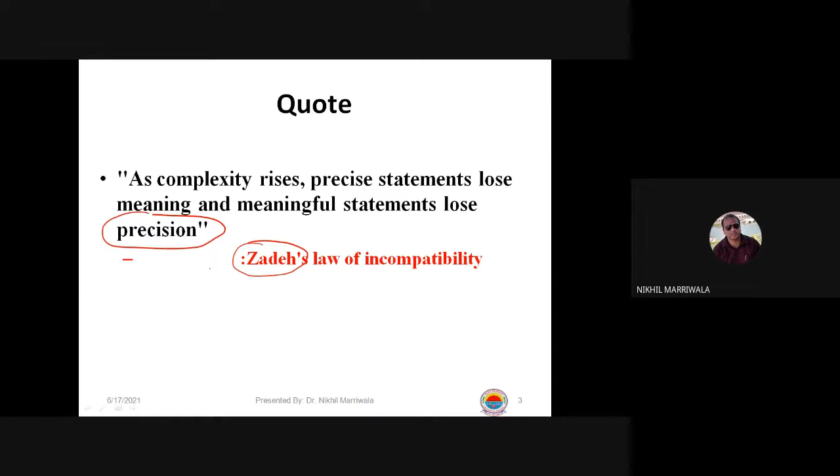Both these quotes are very important when you start designing something, which is why I've taken them. As you increase the complexity of a system, the precise statements you are talking about actually lose meaning. And when you go to meaningful statements, the precision of the system is lost. So how to make a balance between the two? This is what we'll try to learn today.

I'll not take much time with the outline part. I'll move straight to fuzzy logic based systems. These are what we'll be talking about today: how a fuzzy logic system or fuzzy system designer will help us identify the correct output from complex, nonlinear input systems.

This particular chart talks about a knowledge base, which is driven by a rule base and database. The inputs are given to the fuzzification module. The fuzzification module fuzzifies the inputs based on the membership functions that are decided. The fuzzified input is given to the inference engine, which performs some manipulations—I'll tell you in detail how we'll do that. Lastly, the reverse of fuzzification is done by the defuzzification module, and a crisp output is generated.

So a crisp output is generated by the system. The input received is highly nonlinear and complex in nature—the system is also very complex. These inputs are fuzzified based on different membership functions, then the inference engine comes into picture, and the defuzzification module defuzzifies this. So this is a general system.

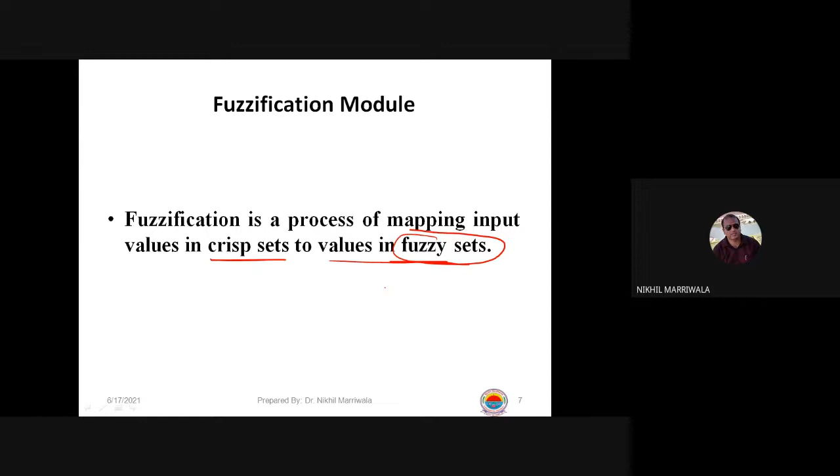The knowledge base is very important in this. How this knowledge base comes into picture and how the fuzzification module deals with us—I'll try to talk about a few things. Fuzzification is a process of mapping values in crisp sets to values in fuzzy sets. We'll be talking about this term called fuzzy sets. Try to remember these words. I'll show you in the software how these would be accommodated.

Knowledge base, as I told you, comprises the rule base and the database. So what is rule base? Rule base is something that we normally talk about.

Right now we were facing a technical glitch. So if, say, I'm using 'if' here—if the WebEx would have worked, then we would not have shifted to the Google platform.

If this would have happened, then this would have been the outcome, right? So we are talking about something in the form of linguistic variables. The database basically is the one which provides us the linguistic control. This is the word used to define the linguistic control, and the fuzzy data manipulation in a fuzzy logic based system is done mainly based on these linguistic control variables.

Rule base is taken from the domain expert. You can call various experts who have delivered lectures in this particular FDP the domain experts of IoT, and their expertise can be taken into consideration for help in designing a particular system, and that can be done in a systematic and easy way - that is, the linguistic manner, like we are talking right now. So whatever we are talking can be described into mathematical functions, and then this can be analyzed by the system. This is what we'll be trying to learn today.

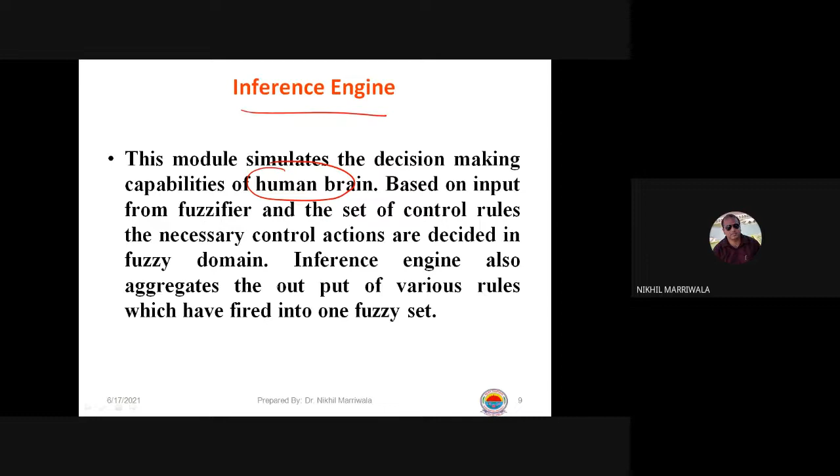The inference engine is basically a module which helps decide or make decisions, just as a human brain. The module is helping us decide what decision has to be taken. Once the fuzzified inputs are received, the implication methods are performed, and all the brainy activities, the decision making activities, are done in the inference engine part. So inference engine is aggregating all the outputs for the various rules which are fired into one fuzzy set.

I hope, sir, my voice is coming pretty much audible. There is no technical problem happening right now. No, there is no technical problem. It is going smoothly. Great, sir. Thank you very much, sir.

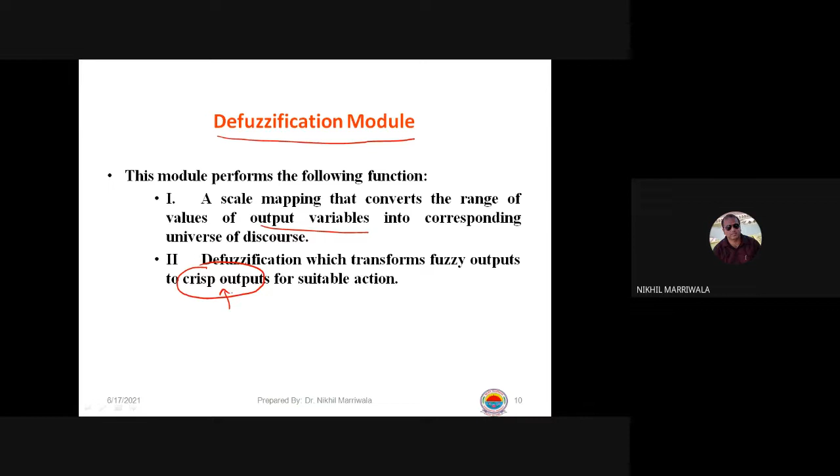These techniques are: the center of gravity, the center of sums, the height of defuzzification, center of largest area, and the mean of maxima approach. So we can select either of these, and these will help us defuzzify the input part, and this is how the system would look like.

If you see, we have the inputs which are fuzzified. The membership functions have to be given in this case. We apply the fuzzy operator here, and then the implication method is given. Once the method is applied, the aggregation of all the inputs received is done, and then the defuzzification is done, and the output - crisp output - is generated. So this is just a flow diagram that we need to understand.

Though it might be looking a little difficult to you, when we design it right now, all these things would be covered in this fashion itself. So this is how internally it would look like. Say we have temperature as an input, or a derivative, or some of the derivative inputs are also given. The inputs are given to a fuzzification module. The fuzzification module decides upon the membership function - Z type, triangular type, or sigma type - whatever has to be selected.

Once these membership functions have been decided, the input is given to the composition module, where we decide about the operator - we decide about both things. The manipulations are done. Then it is given to the implication module, where you again perform some manipulation - again the brain concept, similarly to a processing unit, where all the processing is done, the implication is done, and lastly the aggregation part, that is the maximum or minimum part, is taken.

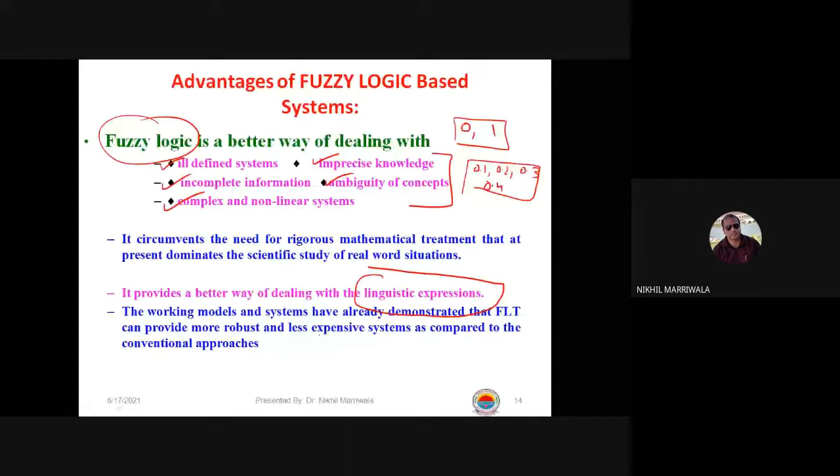So fuzzy logic based systems are definitely considering these intermediate values also, and they're helping us resolve things in linguistic expressions. So this is the important part, right? So today the software that I'll show you would actually have no programming involved. The beauty about it is that we won't write a single code. I'll just use the block configurations and we'll resolve the problem, right?

So, hello? Yes, sir. Anything? Any inputs? No, nothing, sir. Please continue.

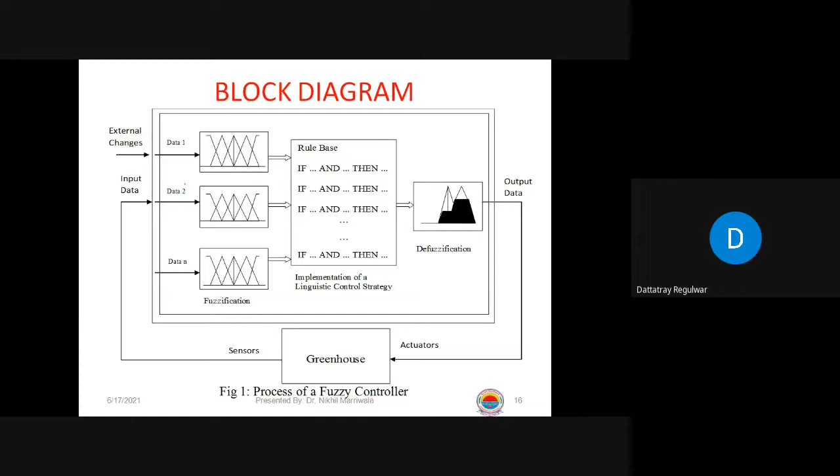Okay, sir. So this is the block diagram, and we will be referring to a highly non-linear and complex system called a greenhouse today. I'll show you how this model would work, and we'll define and design this model on our own, right? So a greenhouse is basically a very highly complex and non-linear system. I don't know how many of you know this structure, but I'll give you a few features and then we'll talk about it. This block diagram says that we have to control this environment, the artificially controlled environment where plants are grown, right?

So several sensors are involved. Now, how IoT is linked with this, I'm trying to give you that idea. So these sensors are basically helping us in analyzing the inputs. For example, the sensors can be a temperature sensor, a humidity measurement sensor, a solar radiation measurement sensor, a CO2 level measurement sensor, whatever you want. So these sensors are taking inputs, and then the input data is given to the fuzzy logic controller that we will design, and then the data is processed and the crisp output is generated.

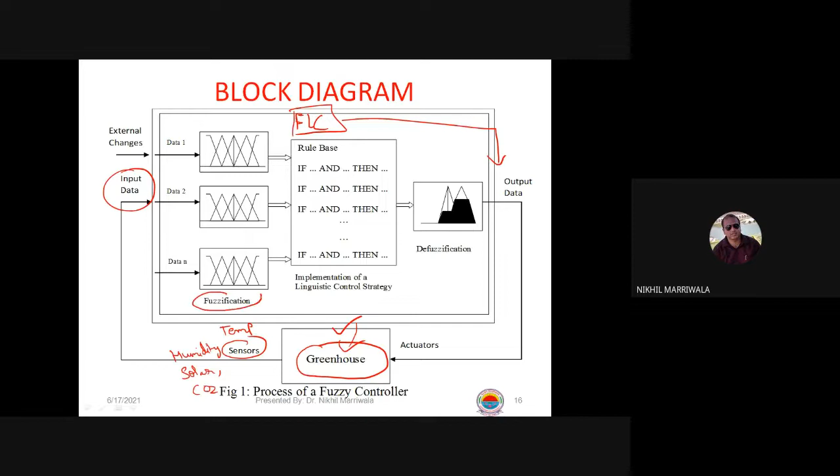So the three major steps that I gave you: fuzzification of the system, implementation of the linguistic control strategy, and the defuzzification part. We will be performing this and analyzing how a system would actually behave or perform under different conditions, right? There are some external changes also which can be considered over here. Now, how the Internet of Things can help resolve these things, I'll show you a very interesting diagram over here.

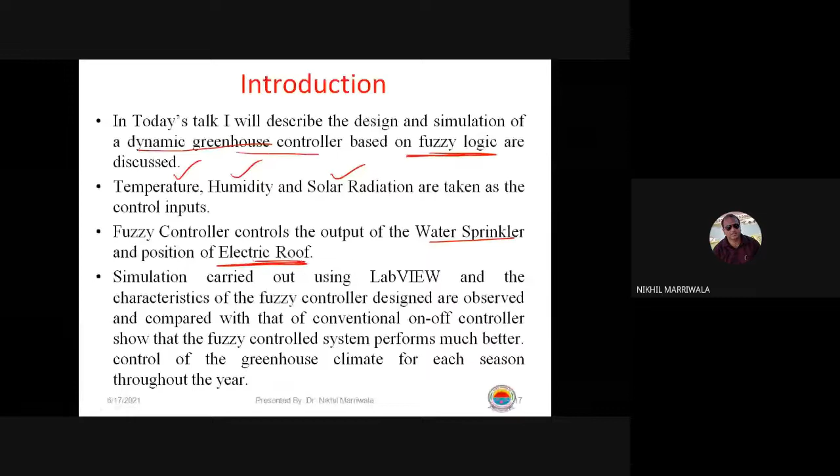So I've already given you what we'll be talking about. We'll be talking about designing a dynamic greenhouse controller based on the fuzzy logic system. The three inputs that we'll take into consideration are temperature, humidity, and solar radiation, and they are controlling the water sprinkler and the electric roof of a greenhouse. So this is what has to be controlled by the fuzzy logic controller.

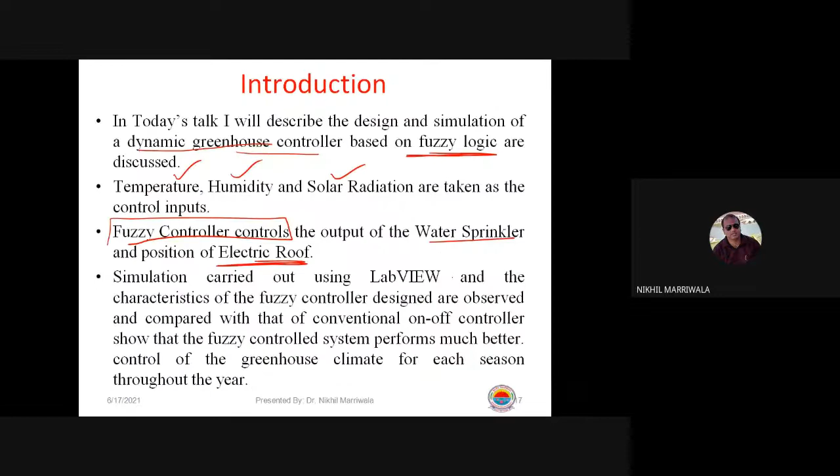Okay, so in earlier days, in the greenhouse systems, all the actuators, such as the water sprinkler and electric roof, were basically being controlled by normal on-off controllers. So a person is sitting, he gets some information or he sees the weather, and the on-off controller performs the action. It takes time, right? If the person gets sleepy and sleeps in the night, the rain comes and the crop gets damaged, or the temperature rises and the crop growth gets damaged.

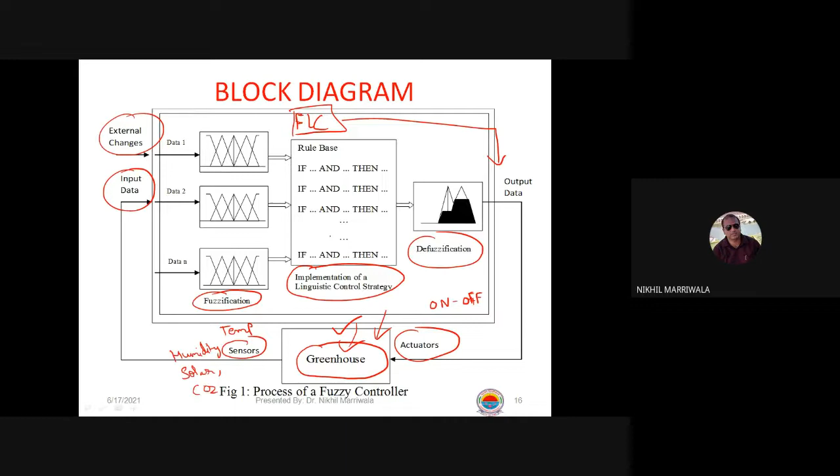So these are the things which we want to avoid, and we want to make this artificially intelligent enough so that even if there is nobody, the sensors are connected in a particular loop and the actuators perform the necessary action, right? So how to do this? So a greenhouse, as I've already given you, is an enclosed structure which is designed to grow plants with enhanced growth.

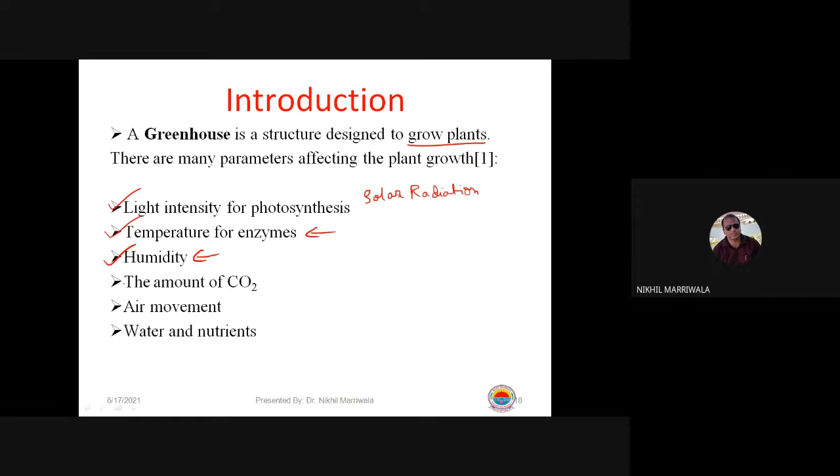So what are the factors affecting the growth of the plant? We already know them. Light intensity for photosynthesis; when I talk about light intensity, I'm talking about solar radiation coming inside. I can just write it down: solar radiation. Temperature for enzymes, and humidity. Yes, we will be taking these into consideration. The amount of carbon dioxide, very important for any plant to grow. Air movement inside it, water and nutrients. So everything you're talking about is affecting the growth of the plant, and this is a very highly non-linear structure, right?

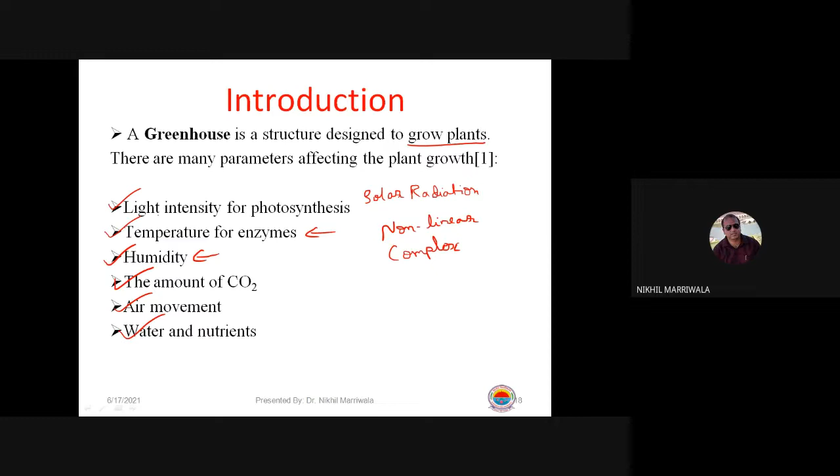Non-linear as well as highly complex. So see the things that are involved over here. So when we talk about this kind of a scenario, we want that this particular problem should be resolved amicably and easily. How to do that? So we'll just see this situation, right? So greenhouse basically will be the solution to provide a growth of plants effectively.

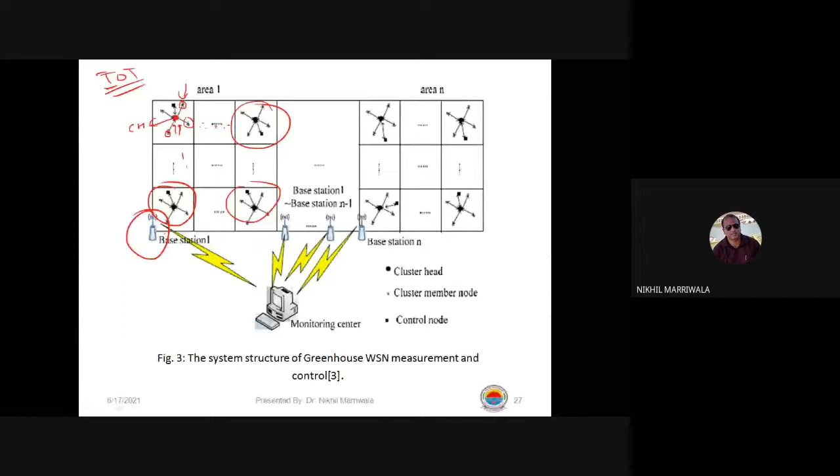The measurement of temperature. Say these days you've normally seen warnings coming for storms. Now how are we getting them? Through satellites or through different sensors that are being placed in the ocean somewhere around. We are even getting some inputs of the change in weather conditions, change in temperature, analyzing it through the base station. Similarly, we have placed some sensors somewhere in a particular area. These are clusters of sensors. They are providing information to this base station. The base station thus transfers the information to the monitoring station.

Now, this is important. The monitoring station is the one where all the data from different base stations is collected. Now, the data is collected and processed. This processed data is then sent back to different fields or different concerned people, so that the action can be taken well within time, and there is no harm to the environment, no harm to the crop, or no harm to the situation where we are actually, right?

So say, for example, if an earthquake is to arrive and we are told even a minute before that, a lot of lives can be saved, a lot of things can be saved. Even seconds before an earthquake can also help us out, right? Or even warnings of storms these days are preventing loss of life. So Internet of Things is playing a huge role in this.

IoT systems are basically ones where we transfer the information these days onto cloud. Right? Now the cloud systems are the ones which are gathering the information, and that can be made public or even private for you to actually see the data being driven, and you can use that, right? So the same thing can be done for the COVID data, the same thing can be done for temperature measurement, any type of measurement, right? So Internet of Things is playing a huge role in this.

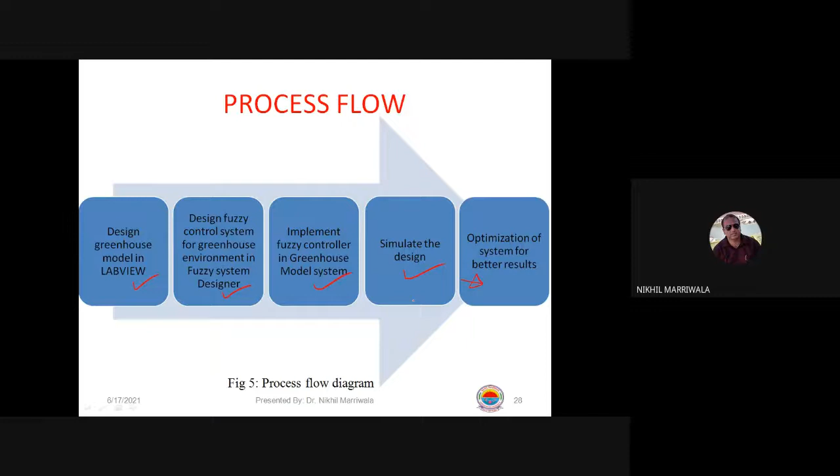Sir, I hope my screen is visible and this is basically audible to you. I hope I'm audible. You are audible, sir. Everybody? You are audible, sir. Great. Thank you, sir. Thank you very much.

So what we'll be doing is we'll be making use of this software called LabVIEW. So first I can show you from where you can get this. You need to visit a website called ni.com. This is called National Instruments, and this is one of the most advanced softwares that you can get, right? So you can go to products, software, and this is the one, LabVIEW, right?

So it will open the products part, LabVIEW. You can click onto it, you can download it and install it. Though it is not freely available, the trial versions are available over here. So when you click onto this, it will ask you what operating system you are using, right? So you can click onto this start free trial, select your edition, and then you can download it. So I've already got it installed for you people. So this is the website again. Now, for the benefit of everybody, those who are new to this particular software, they can download it and install it on their own systems, and then they can work with it, right?

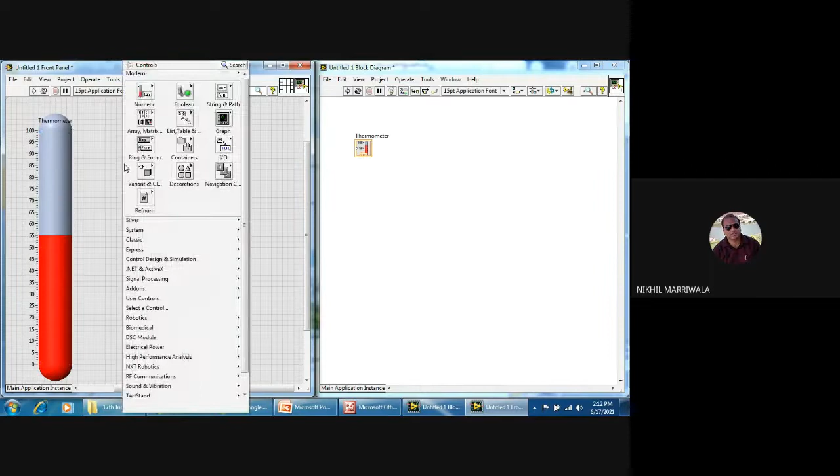So one is front panel, another one is block diagram. Front panel and block diagram are the two things that we use as far as LabVIEW is concerned. Front panel talks about the things which you can see. Say, for example, a thermometer, right? So it is producing some output. I can extend it. Or, for example, a vertical pointer, a waveform graph which will plot something, an LED. I can just change the size. So these are things which are helping you to represent some things, right?

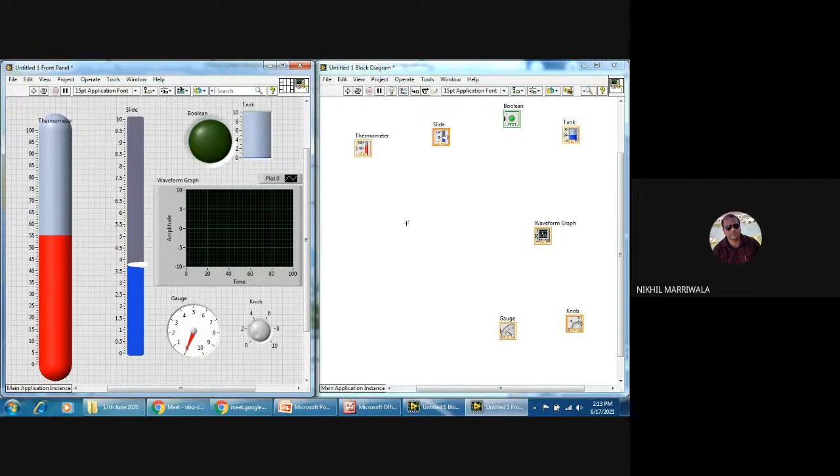So whenever I'm placing something here, you see an icon coming into the block diagram also. You can see the icons, right? So whatever you place here, the icons will be placed in the block diagram window. So this is the back-end programming part, and this is the front end. That is why it is called front panel, and this is called block diagram. So we are not writing any codes, but we'll still program this, and we'll see how easy it would be for us to design complex problems.

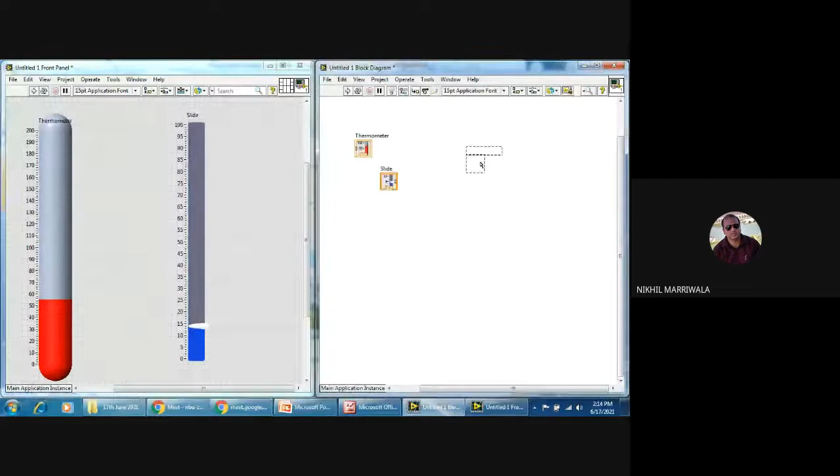So I've just removed the things, and I'll show you a very interesting aspect. I'll make this 200. This is already 200, so I'll make it 200 over here. So a thermometer and a slider, right? A very simple program. I'll just go to the block diagram over here, and I'll connect this slider with the thermometer. When I move my mouse pointer over here, the wire comes and I connect them, right?

The simple part is that I need to run this. Say I move the slider to 80 and then I run this. So you will see the temperature changing, right? I run this again, lower, the temperature is changing. So this is a very simple thing. Now, I'm just showing you how to work with it so that you are able to not only use the fuzzy logic part but work with the other aspects also.

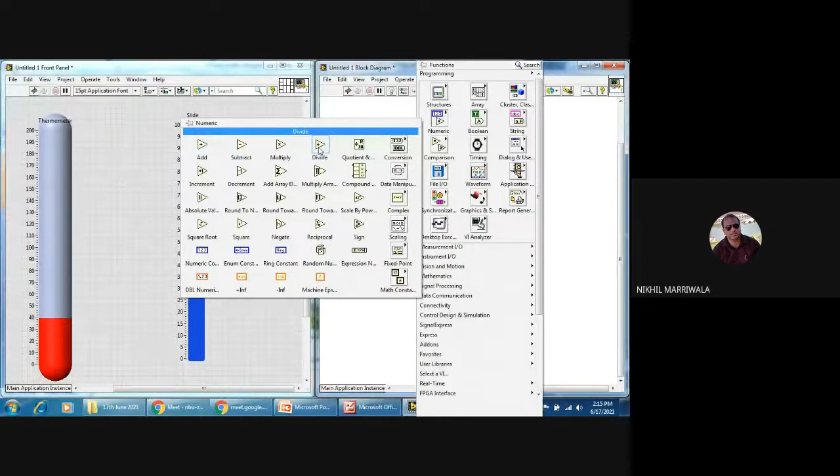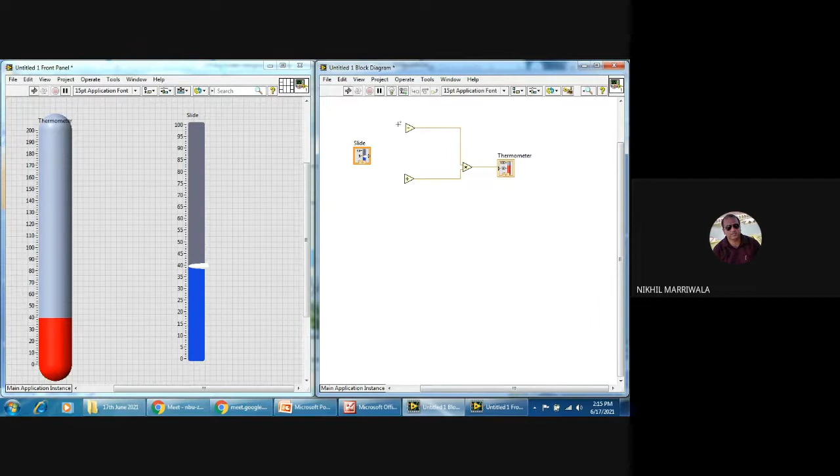So let's just delete this wire over here and place some numeric components: a multiplier, a subtractor, a divider. So I place certain components: right click, numeric, and you see, right? What I'm trying to show by this is I'm connecting them together and implementing some mathematical function inside this, right?

So right click onto this, create a constant. Right click onto this, create another constant. Again, right click onto the other input parameter, create another constant. So these are some of the constants, and I can give some values to them. Say some random values, 5, 9, 32, right? Some mathematical functions have been implemented. And now when I run this, the output will be according to that. You can very well see that the function is working accordingly, right?

I can replace this also, right? So just right click onto this, go to replace, numeric palette, say with a multiplier, right?

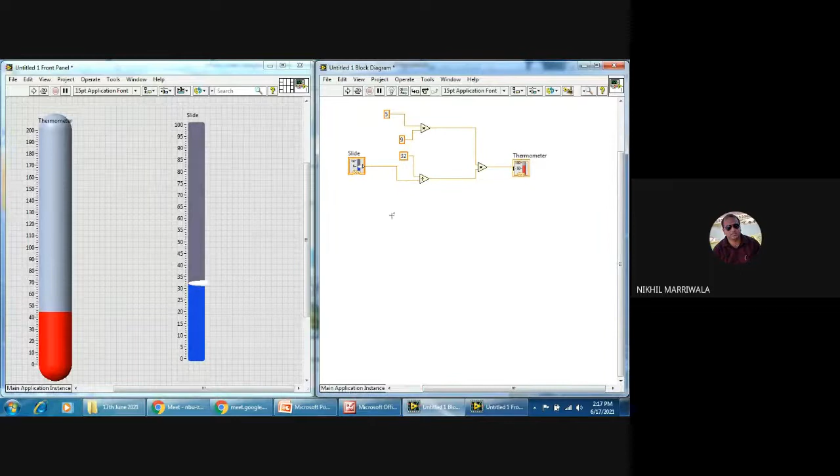You can see this now. It is performing some mathematical function over here. Now, again, I have not written anything, but I'm using the block diagram. Now, what you are witnessing is that each time I have to press this run. So those who are familiar with some basic programming idea, what I can use is a while loop.

I can use a while loop. Again, I'll do that for you. Right click, structures, while loop. I go here and create a control for me. So the stop button comes over here now. I can just expand this. Now when I run this, it will keep on running continuously. You can see this now. I hope everybody can see this.

So you can change the mathematical function. Say I thought that now do something more, right? Let's insert another numeric function, right? And then I'm just removing this, right? Let's just insert another numeric function inside it and then let's process this. Right, so anything that comes to your mind can be implemented there and then only. Very simple thing. Again, I've just shown you a very simple example to make sure that everybody understands.

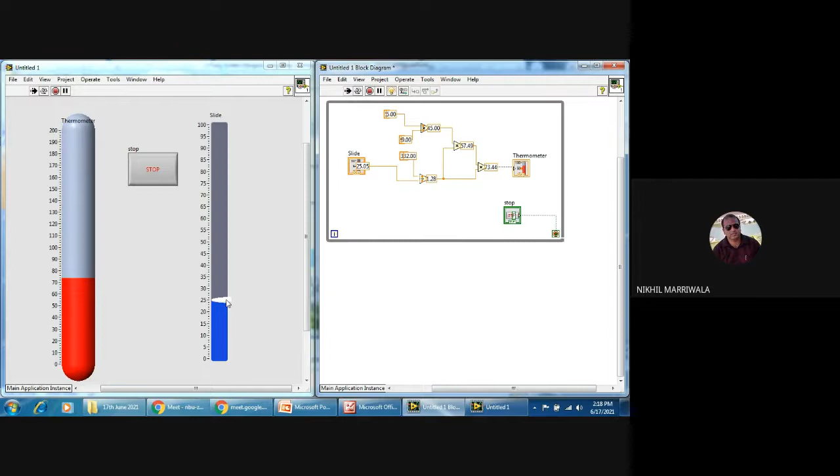There is one more interesting thing in this software. It is called highlight execution. I'm just introducing it so that everybody is familiar with the environment that you are working with. Now, when I press this highlight execution, I hope everybody is able to see some data flowing inside this. The data is flowing inside the circuit, right? And the output values that you see after each node.

So now when I change this, the change will take some time because data is flowing inside and it takes some time to reach the output, right? So earlier it was very frequent, right? So if I stop this highlight execution, again the change would be very fast, right? So these are some of the good features about this software. Again, I don't have to write any program.

I don't know which field you belong to, but right now have a look at the screen that I'm trying to show you. Say I start with the vision and motion toolbox, if you belong to mechanical engineering, right? The entire vision and motion toolbox is present in this. It can be used by computer science engineers also while they are working with vision aspects, right? Say you are working in the mathematical field, so the mathematics toolkit is present. Signal processing, a very huge signal processing toolkit is there. Data communication for transfer of data, we'll see and use some of the aspects here also, right?

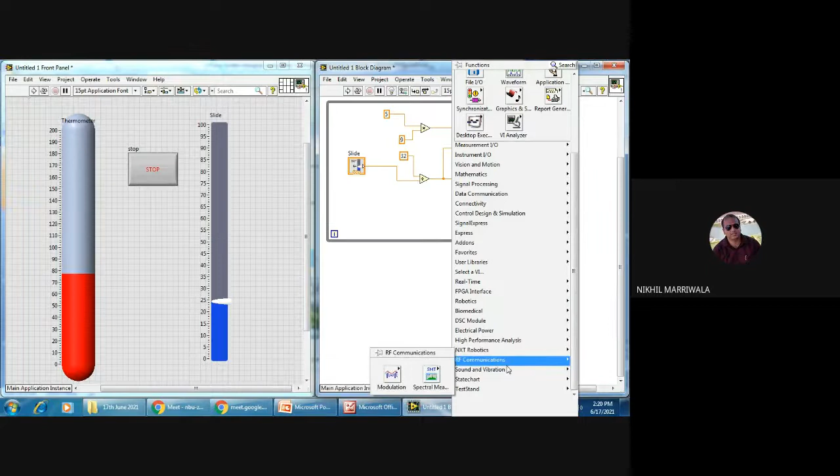Data communication, connectivity toolkit, control design and simulation. We'll be using this, the fuzzy logic, right? Here it is, fuzzy logic. So fuzzy logic, PID, simulation, etc. Signal Express. Say you are working in robotics, so you are able to see robotics. A KUKA YouBot robotics toolkit is also there, right? Biomedical signal processing toolkit. I'll just move this up so that everybody is able to see this. So biomedical signal processing, electrical power, NXT robotics, RF communication, sound and vibration. You talk about any toolkit, all the toolkits are present in this structure, right?

Right now, I'm using a very old version. When you visit this page, you'll see huge toolkits are there. Many toolkits have been changed, right? And these toolkits, you can definitely find and install in your system, right? So this particular software, irrespective, again I repeat, irrespective of any field you're working with, all the toolkits are present. They have a neural network toolkit, an IoT toolkit, an artificial intelligence toolkit, right? So even the Xilinx part can be worked through that, right?

So whatever toolkits you want to download, you can just search for them. And when you write toolkits, it will show you some page and then you can download them, right? So again, it depends on the version that we are using. So here these are LabVIEW 2020 toolkits, and say I want only the products. So now it will show me the products, right? So you can download them. So the electrical power software platform bundle, the entire bundle is there, which downloads everything for you, right? So you name any field, again I'm repeating, all the toolkits are actually present over here. The IoT toolkit, the artificial intelligence toolkit, and others are also available, right?

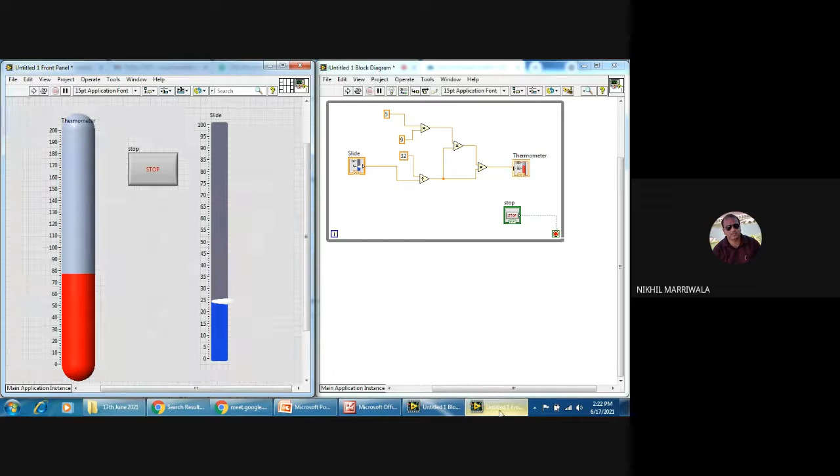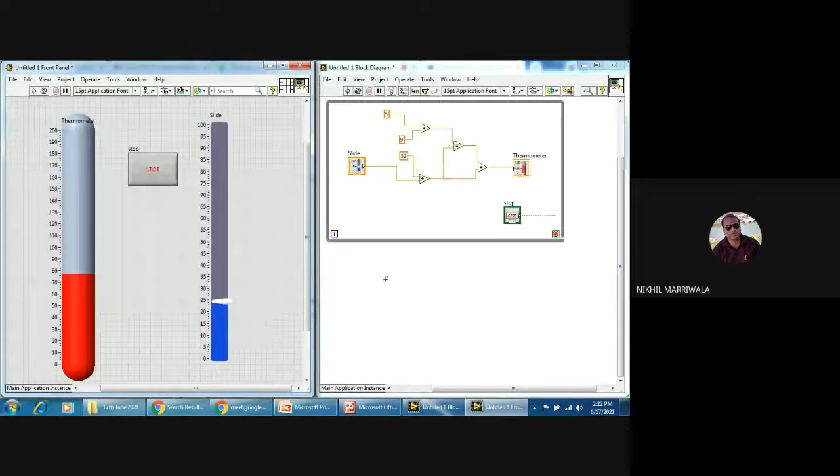So now let's move on, because our aim was something else. We were talking about designing a greenhouse controller using the fuzzy logic structure, and we have to design a fuzzy system. Though you are not even familiar with this, it will be very easy for you. Most of you must have used MATLAB also. It is a pretty decent environment. The point we will work with now is how to use this fuzzy logic toolkit and how to implement the project in it, right?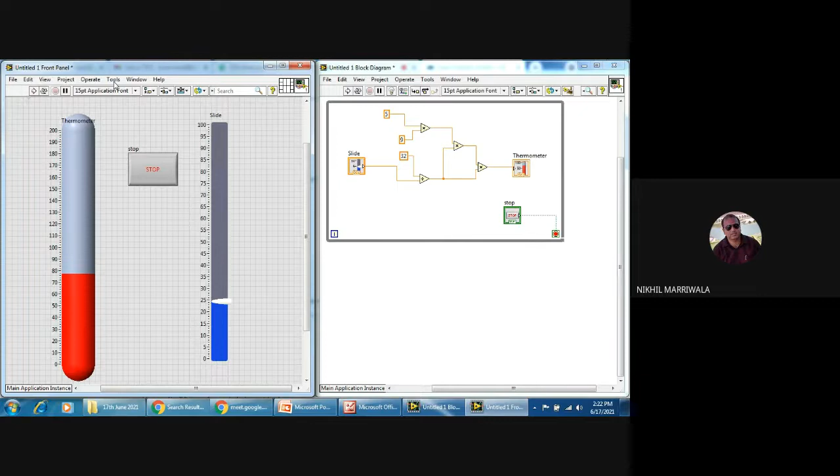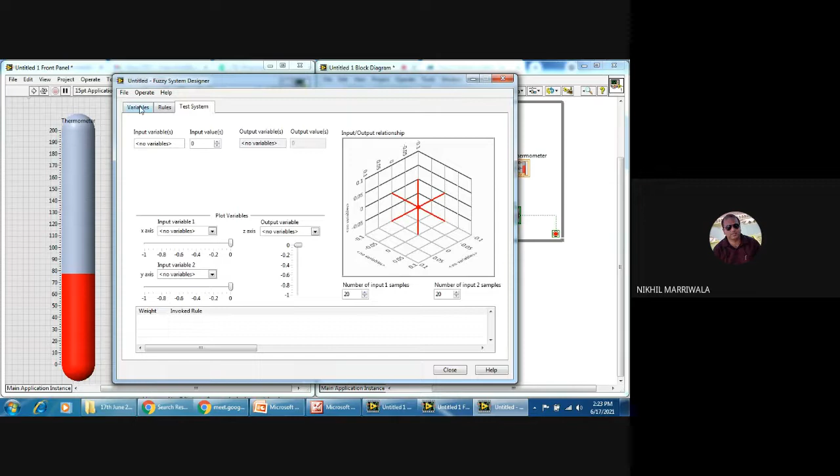So what you need to do is go to tools, click on tools, control design and simulation, and click on fuzzy system designer. This is the one. When I click on this, you'll see a fuzzy system designer block opening in front of you. Right. So this is the fuzzy system designer. You have rules and you have test systems, right? I'll tell you all the steps of how this fuzzy system designer will help us design the complex greenhouse controller, and then we'll implement this controller into the circuit.

Right? So the very first thing is we have to decide about the input and output variables. When we talk about input and output variables, we are referring to the things that we decided in the PowerPoint slide. So the very first input variable should be temperature, right? Say I have taken it from -10 to 60 degrees. So I'm taking extreme conditions, right? Very rough data. Plus the second input, humidity. Let's take humidity from 0 to 100, right? Again, just rough information.

Add the third part, solar radiation. This is the third input parameter that we want, right? Solar radiation. So temperature, humidity, and solar radiation are the input variables. The output variables that we want to control are the electric roof, right? Again, you can take any values that you want, say 0 to 100. I've taken the outputs electric roof and water sprinkler. These are two very important aspects of a greenhouse structure. We've just seen them, right? So I've just taken some random values for their range.

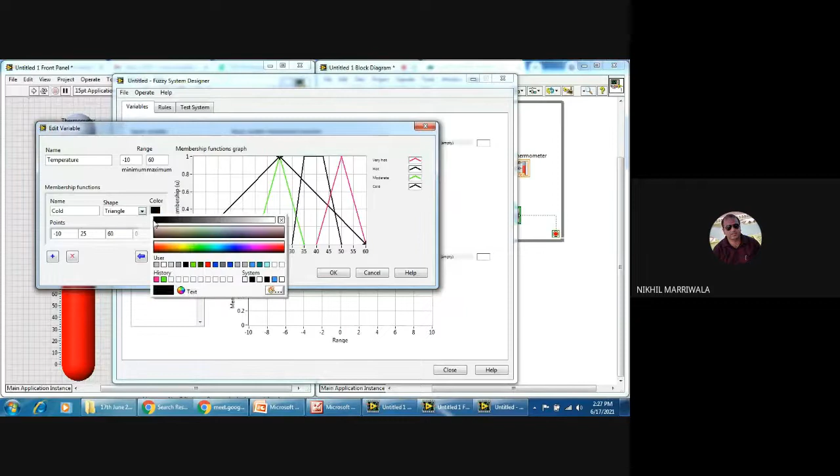This is hot. Next, moderate. So temperature is moderate for me now. Let's change the color so they look different. Yes, 25 would be fine, 35 would also work, and say 15. Again, these are random values. See, right? Add cold. Temperature is cold for me now. -10, 0, 10, or say 15 would also work for cold, right? Even 20 can be treated as cold, right? I can change this value also. So you can see, you can change things accordingly, right?

Now what you see is temperature with 4 membership functions: very hot, hot, moderate, and cold. You see the pointer I'm pointing towards, right? Now the next part is humidity. We have to do the same thing for humidity. Humidity is either wet, normal, or dry. I can even take very wet. Again, I'm just taking and using them, right? 100, 90, and 80. Just a rough idea. Very wet. Now what would be wet? The next part. I'm adding this value. Wet. Say I take a Gaussian function for this, right?

95 and 85, 75 value, 60 value, again just a rough idea. Moderate, or say medium, I can write it as medium humidity, right?

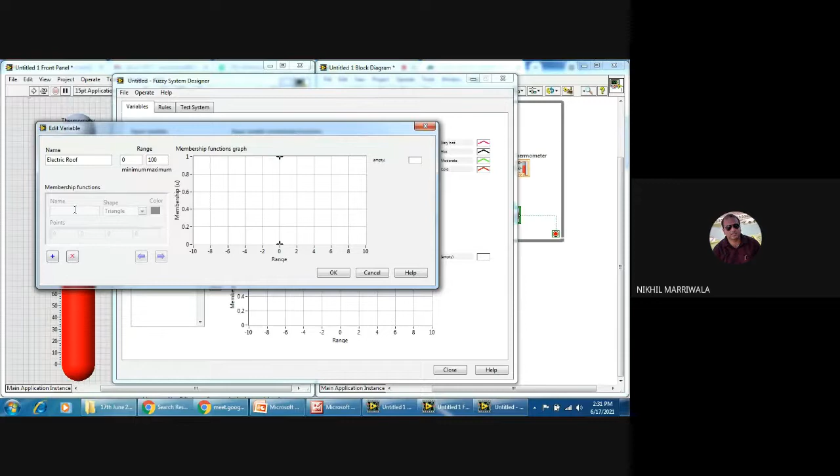So electric roof. Electric roof is the one that you need to control with the on-off controller. Now what we want is we want to control it through fuzzy system. So let's see, electric roof: open, closed, semi-closed, right? So let's say it is open first. 100, 80, and a 70, just a rough value.

Semi-closed is the one that we are talking about over here. Let's keep it black only. So 80, 60, and a 40 is semi-closed for me. Closed. So let's start from its value itself, 0, 20, and 40.

Or say I take an intermediate value for you, right? So this is the membership function for electric roof. It has come over here, you can see this, it is coming up. Water sprinkler.

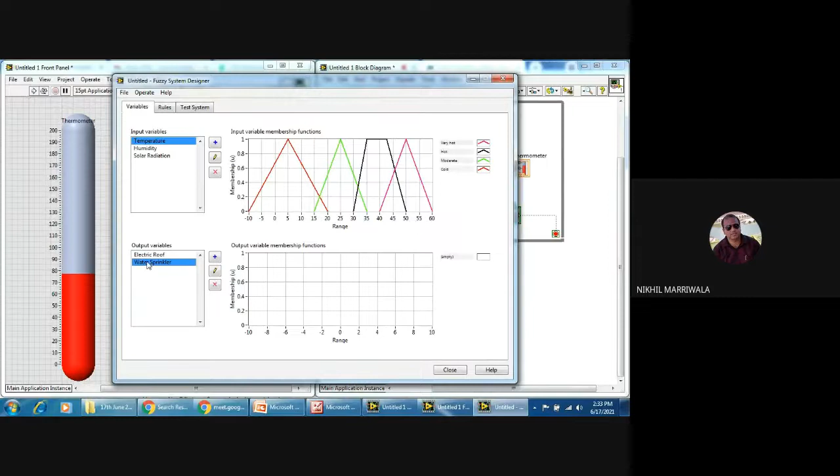Now again, water sprinkler. So whatever I'm talking about over here, we have already decided this, right? So we have decided how this would be done, and we'll try and formulate this. Going back to water sprinkler, what should be the values, or what should be the linguistic functions for water sprinkler? You can see this in this chart also, right? Moderate, more, less, whatever you want to talk about. So say we start with more.

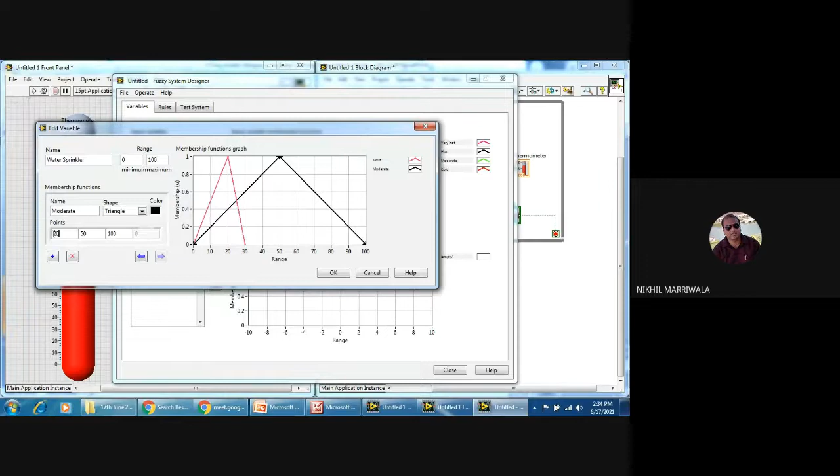So we start with more, so we would want this to be open, right? More, moderate. Let's keep it from 20. Again, these are some rough values that I'm taking, these are not the measured values. The measured values will come directly from the sensor, right?

50, 70. Now we have just taken some values, right? So even I can, there is no harm. Yes, so we have decided some values for water sprinkler, electric roof membership functions, and then the membership function for temperature, humidity, and solar radiation.

I hope everybody has followed these steps. Now you can even change them, edit them, delete them, whatever you want to do, right? So these are the functions over here: edit, delete, select and delete, select and edit. You can even go inside and say, this is the function that you are having, you go here and you pull it, right? So by pulling the points also, the values can move.

Now intermediate values can also come, right? You can see this intermediate value. How fuzzy system would behave for an intermediate value? This is what we want to understand, right? Say again, I go here and I'm dragging this, right?

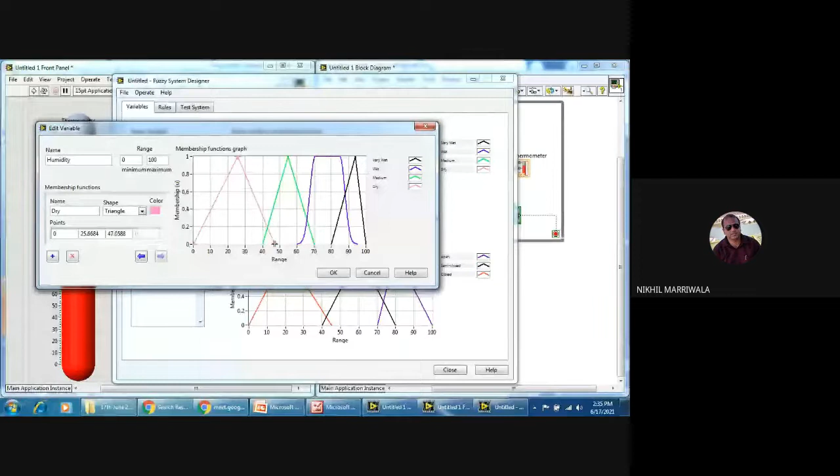Now I select this value, some intermediate values coming for me, right? I select this value again, say an intermediate value for this. So I made all the values as intermediate now for you. You can change them also, right? You can change it, so everything can be done over here. So how fuzzy systems are behaving? Yes, sir.

So I hope everybody has followed this. Any doubts up till this point? Kindly just do let me know.

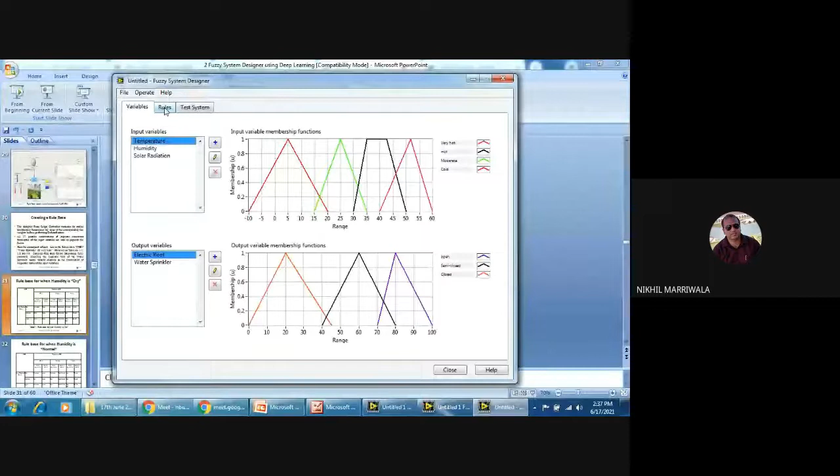Now this is the important part. If you see this window, you have certain ways to decide about rules. This is the if-then-else statement to be utilized. Add rule: now when I move my cursor to this and press it, if temperature is very hot, electric roof is open. Everybody agrees with this, there's no problem. But where are the other antecedents? They are not available right now.

How to enable them? Click onto this point, change it to humidity, change it to solar radiation. Everything comes: the temperature is hot, humidity is dry, solar radiation is high. Then what happens? Again, consequent. Antecedents are temperature, humidity, and solar radiation. What are the consequences? Water sprinkler. Electric roof is open and water sprinkler is also more.

I just decided this on my general knowledge base. I can formulate hundreds and thousands of these rules, there is no limit to that. But because this is my knowledge base that I'm utilizing, the system doesn't become intelligent accordingly. So what needs to be done? You can make any number of rules in this, there is no limit.

I'm just deleting them. Say again, I've added certain rules. I want the system to itself generate the rules for me intelligently. So this is the one which makes it different from other systems. So what we'll do is clear all the rules. First, clear all the rules. Go to operate and click onto pre-generate rules.

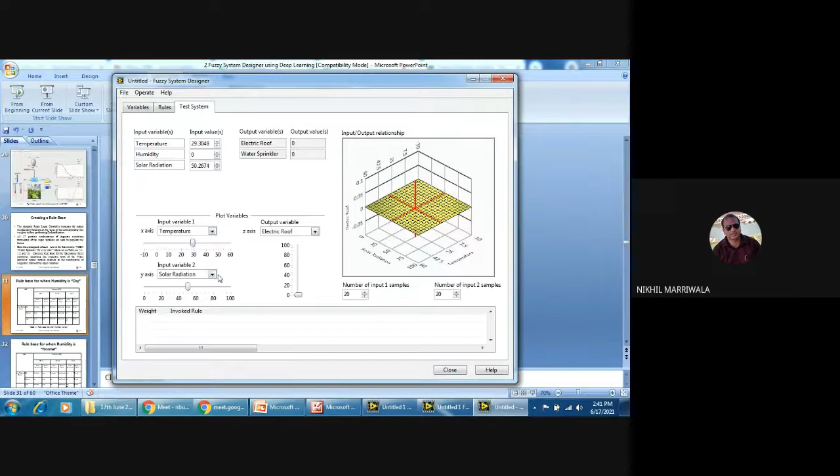You will see some rules being fired below. You can very well see the 3D chart, I hope everybody is able to see this. So if I change the values, the fired rules are coming here, and the output variable of water sprinkler is also changing accordingly. You can see this, right? You can very well see this.

Yes, all the rules are changing once the temperature is changing, right? So similarly, you are able to see the outputs. I hope you are following what we have said. So the rules which are fired are placed here, the weights are placed here, and this is how the system would actually work for you.

Now this is that easy. We just decided on our own: if this is this, then this is this, then what happens, right? So if-then-else, and everything is worked out for us. So the values, variables, rules, and test system - these are the 3 things.

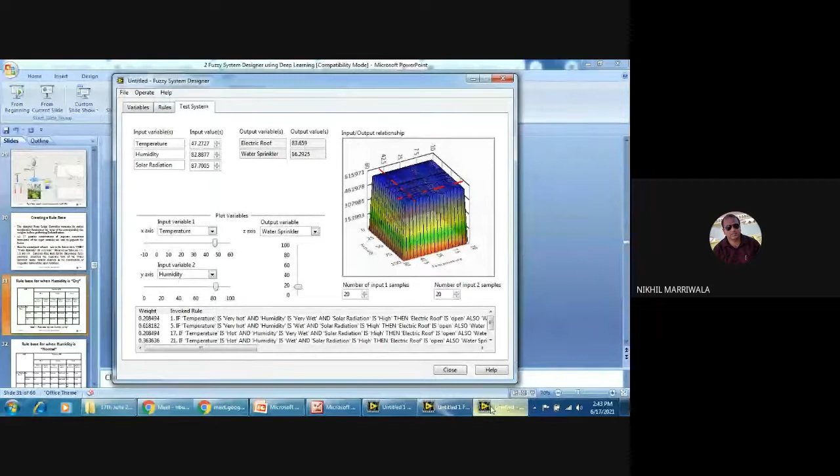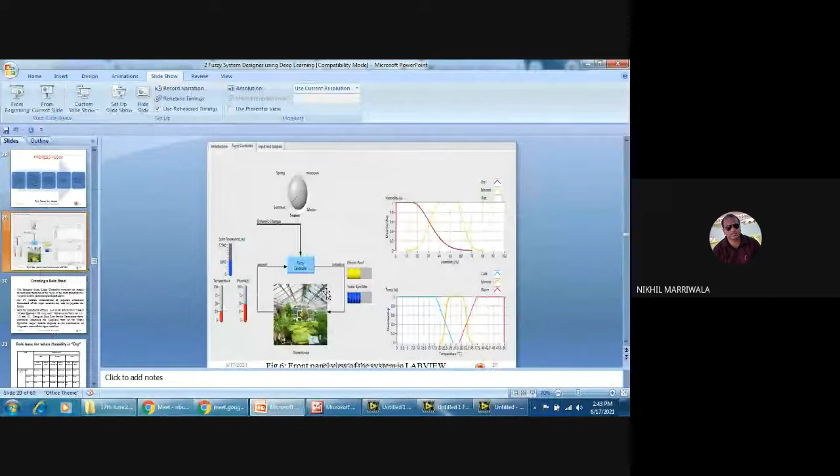Now I'll just move back to the PPT and talk about how this system can be implemented here. Now this is what we are trying to show - the fuzzy control. This is the one that we have decided. 3 inputs: temperature, humidity, solar radiation. 2 outputs: electric roof and water sprinkler. I'll show you because not much time is left with us, so I'll show you the direct VI over here.

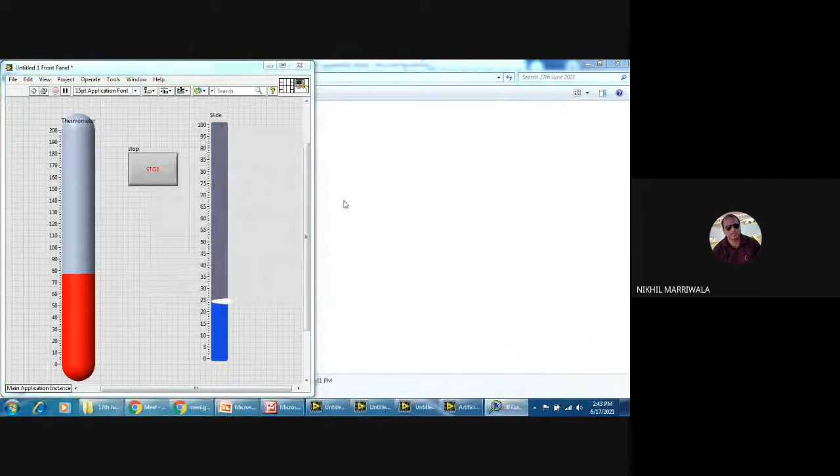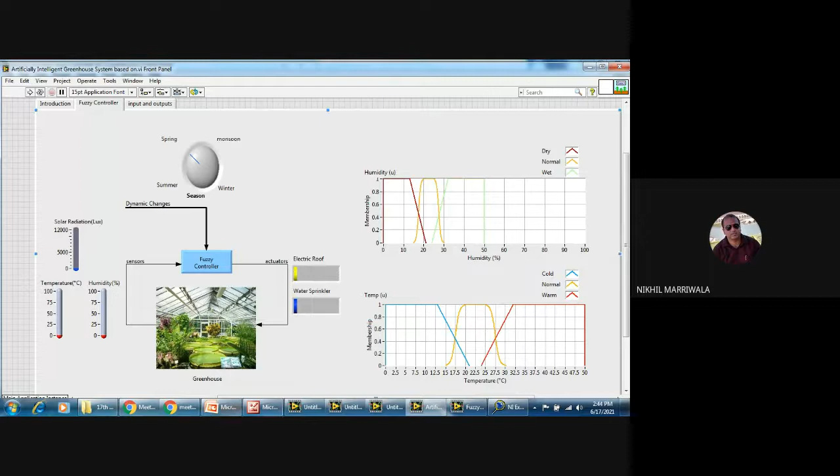Again, I repeat, I'll show you how I am doing it, right? With the help of a camera, I'll show you how we are utilizing this. So let's just first run the first module over here. You can see this. I hope everybody is able to see the screen, there is no problem here.

So when I press this run button, you'll see - say for example, we are in summer season, temperature is soaring to 30 to 33, humidity has fallen. Do you see the change happening in electric roof and water spill? Do you see the changes? Humidity is constantly varying, so the change is happening. Temperature has further increased, humidity has also increased, and if it is reduced, then water spills should open, yes.

Temperature has fallen down drastically - in summers only I'm talking about, right? Then what happens? So you're able to see this. Season changes, output changes, output also changes with the input. I hope everybody is able to see this.

Are you able to see this? Yes, sir. Yes, sir. Yes, sir. Right, right. So this is actually happening in front of us.

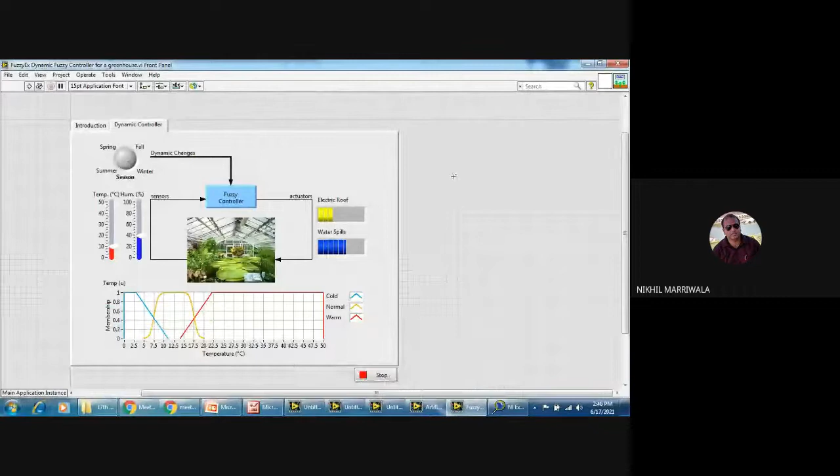So we can very well recognize, yes, practically this can happen. Now, because this is what I'm controlling - I am controlling the input variables. Now, if they are controlled by, say, and I'll switch on my camera first. This is the, I'll just open it.

Now, I don't know if you're able to see this. Now, this is the IoT device that I'm using. Temperature sensor over here, right? And a humidity sensor over here. This has been connected. Now, you can see this, this is the IoT device.

Right now, one of the humidity sensors is not actually working properly, but yes, I'll show you the data collected first in the cloud and then provided to the system, right? So I'll go to the cloud system here.

IoT-LogIQ is the cloud that I am using right now. You can use any of the clouds available. You can even use the cloud provided by MATLAB. I don't know how many of you are using it. You're using MATLAB? How many of you are using MATLAB? Yes, sir, yes, sir, I have used So MATLAB. MATLAB has provided free access to cloud named ThingSpeak.

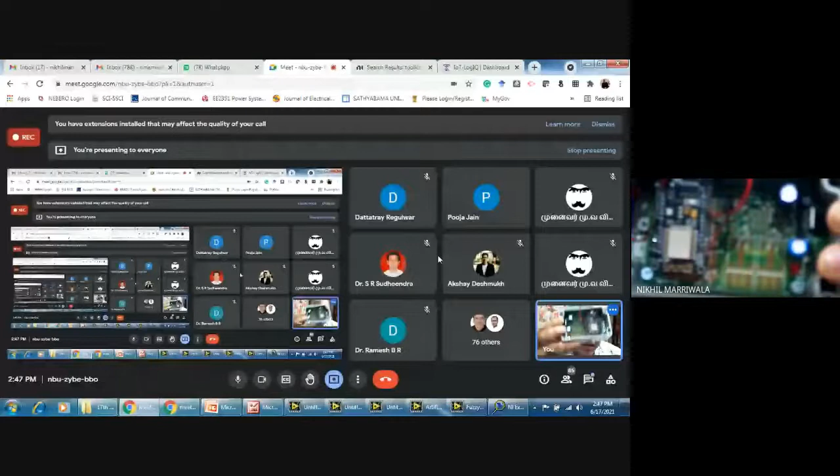I don't know how many of you are using that. And you're able to see this - this is the IoT device that I'm using for transfer of my data in real time to the cloud. IoT-LogIQ is the cloud over here. And I've made my account and it will now recognize my device. So if you see, the humidity is not actually coming, but temperature is definitely coming, right?

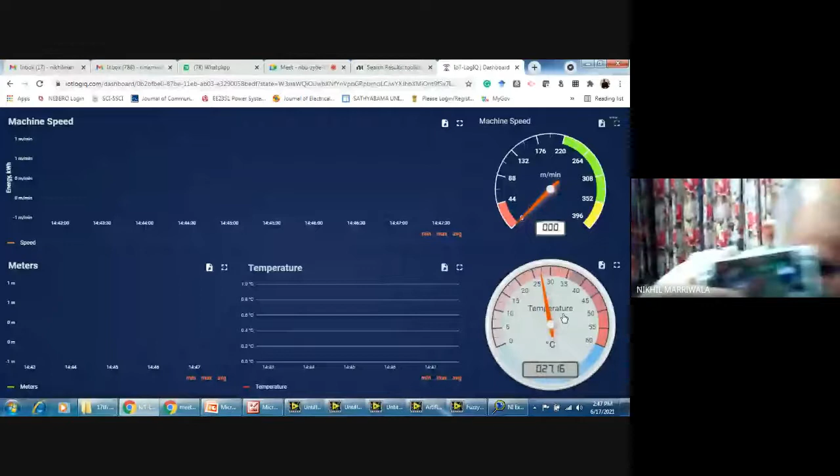So I'll just change this - it's not showing me the room temperature right now. Let me just first - I forgot to connect this device with my system. So now it is connected and you can see the LED light also glowing. I hope everybody can see this now. You can see the LED glowing over here, and this is the device that we are talking about.

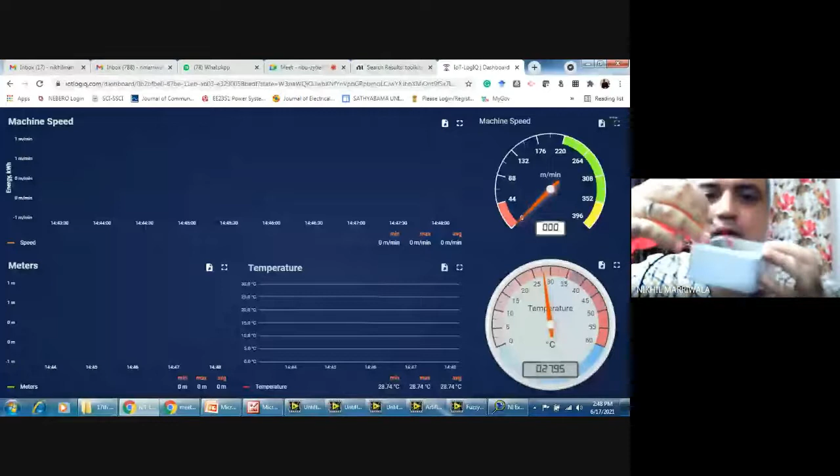So now, yes, it is connected, and you can see some variation. You'll see some variation when I try and change the temperature. Are you able to see?

There is some movement happening. Yes, and the chart would also start plotting. If I put it near the fan of my laptop, it will change effectively. Right. So I've just placed it near the fan of the laptop, because heat is being generated.

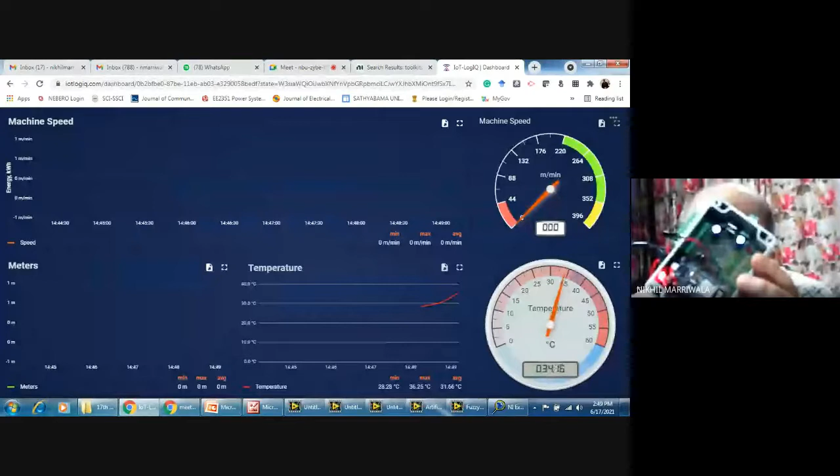You can see the temperature rising. This is happening in real time. So the temperature has increased. Now I just move it away from that. So this is in the cloud that we are getting the temperature. Now this temperature can be stored, and this can be utilized after some time, right?

There is some problem in this humidity sensor, so it is not actually providing me the output right now. I'll have to check it again. There is some connection break that has happened, but you have definitely seen the temperature part changing, right? So now we'll use this data in real time in the system. Again, the humidity part is not actually working, but still there will be some input received.

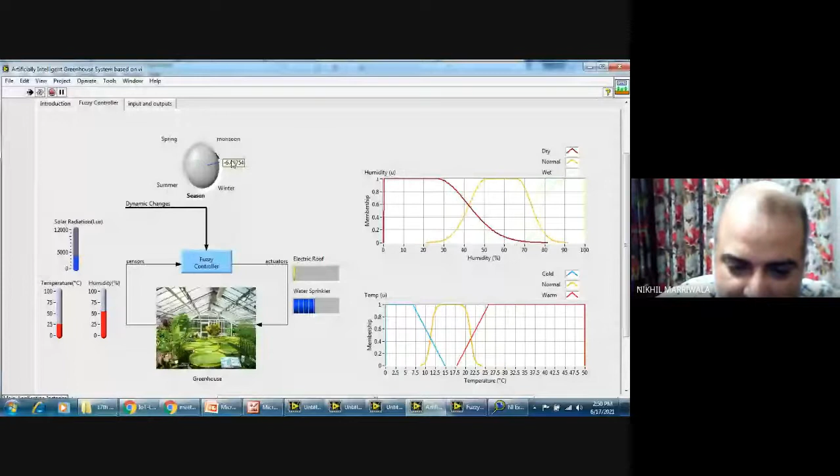So you can see this, the temperature and the humidity. It is showing some data over here. The solar radiation, I have not connected any sensor. I'm just controlling it on my own over here. So you can see the values. I hope you can still see the change, though it is not that drastic, but in real time, this is how it would work, right? I hope you're able to see this.

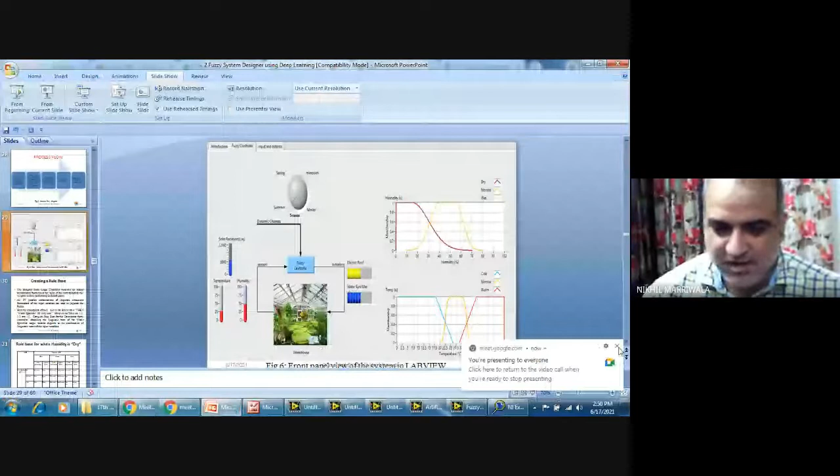Right, great then. So what I'll do is I'll just finish the presentation, the last part left. So we've just seen this model, and I'm just disconnecting it right now so that all the ports are utilized. That is the difficult part. So this is the chart. Again, you can make your own chart for all the inputs that you have, and then you can work with this particular system over here.

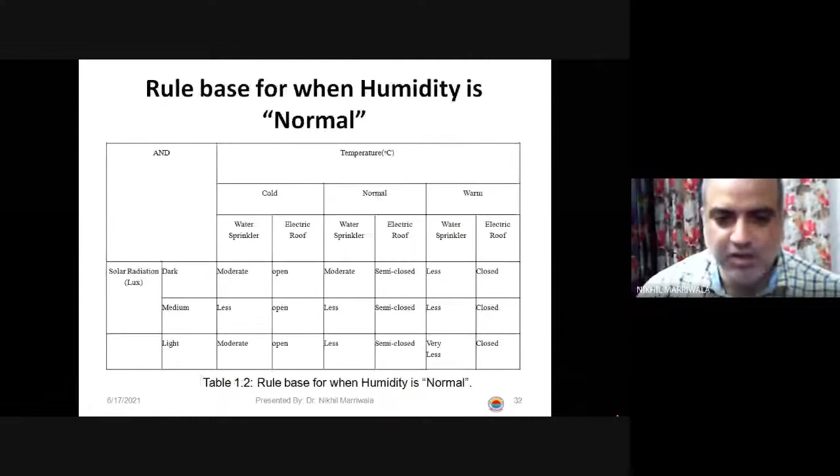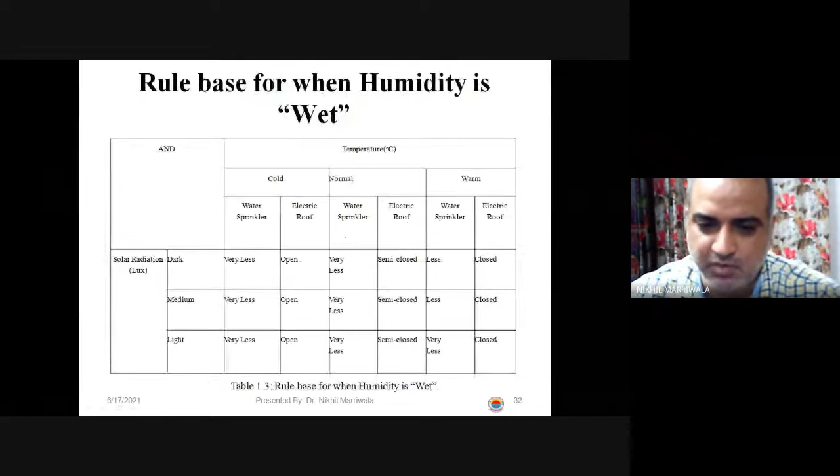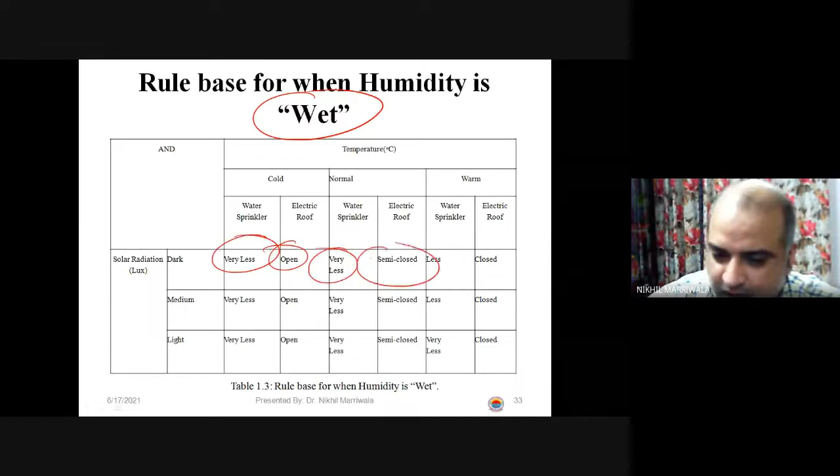So as far as humidity is concerned, there is a dry chart for this. If humidity is normal, then what is the output, and if humidity is wet. You can take it for the electric roof also, right? So this is the matrix arrangement, and then very less open, very less semi-closed, anything can be formulated. So this is what I showed you. Temperature, humidity, solar radiation, electric roof, water sprinkler. I've changed some things over here.

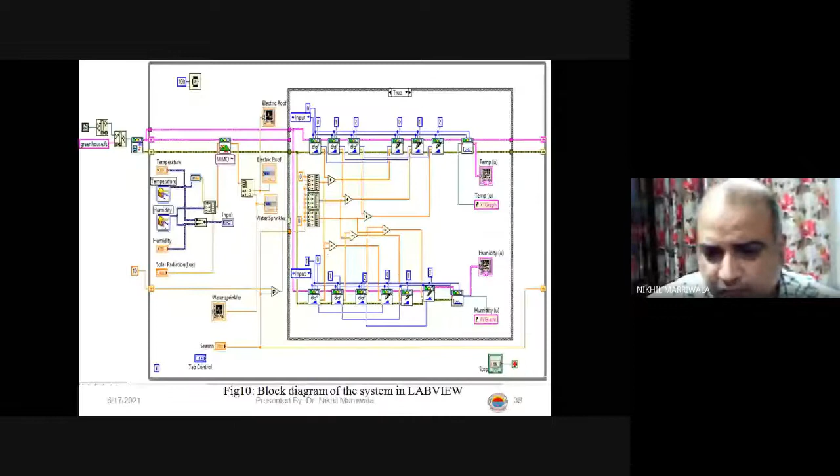We gave the membership functions, decided about the rules, decided about the defuzzification method, and then the output, right? The implementation in the LabVIEW part. I can show you the result also. Just give me a second. The input output results are also shown. So you can plot them very easily. So they are being plotted, right?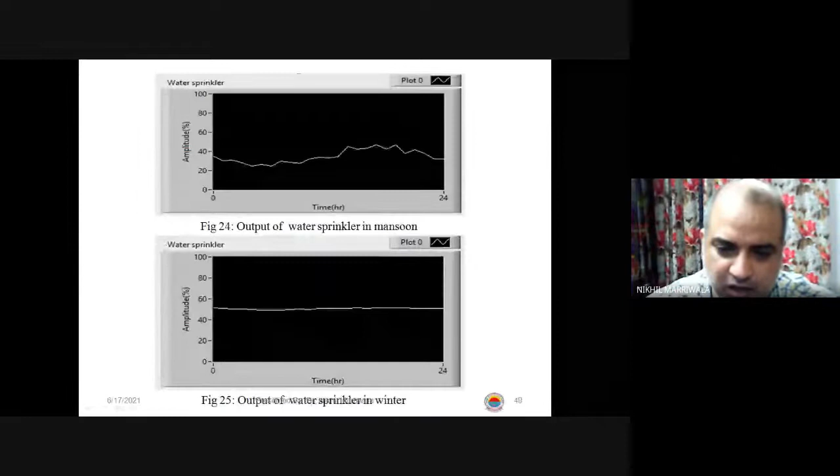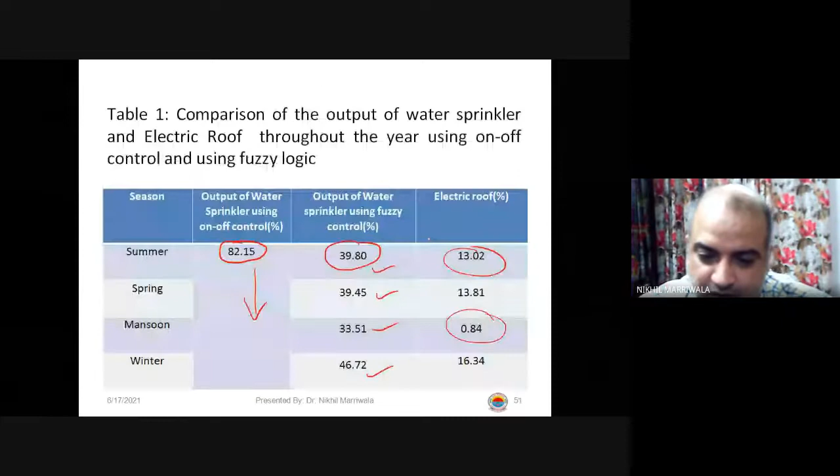Similarly, for the electric roof, the power consumption has reduced to 13.02, and in monsoon it has reduced to 0.84. So earlier it was around, say, 40%. So have a look at the reduction of the power required for working these out through fuzzy logic control. So this is the best part here that we have seen.

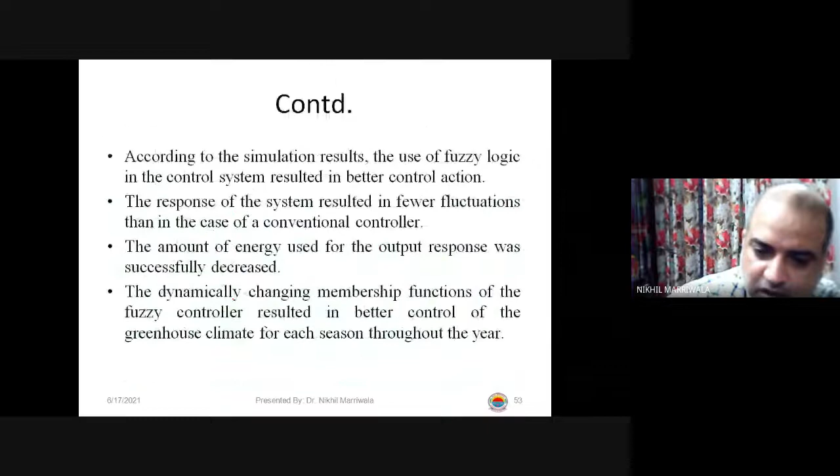Future work, yes, you can implement a lot of things. You can implement a PID controller for it. You can implement a ZigBee network for that. So whatever you want to do, there are so many things available. Now, if there are any queries, you're most welcome. I hope, sir, I was able to explain things effectively to you. And now I would love to ask if there are any queries from your side.

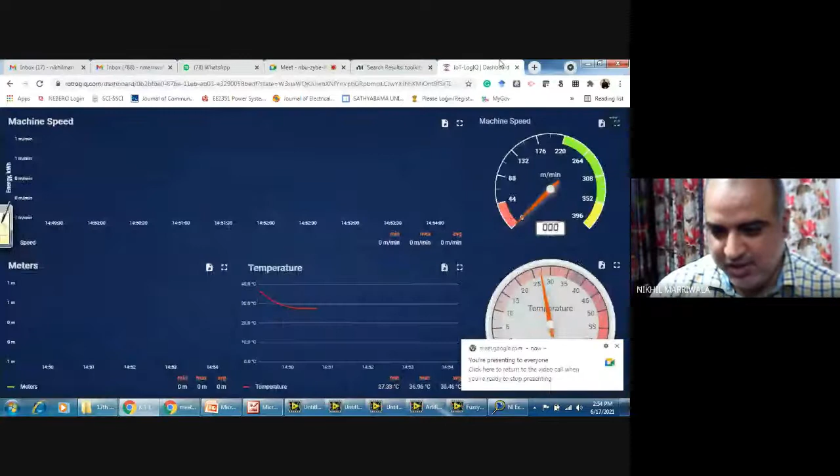And now from the cloud, you can gather the data or input the data into the LabVIEW part. There is that system also. There are a few more clouds from where you can gather the information, though I have not taken it in real time right now. I've just gathered the old data and I'm using it. So what I'm doing is transferring the data from the sensors to the cloud.

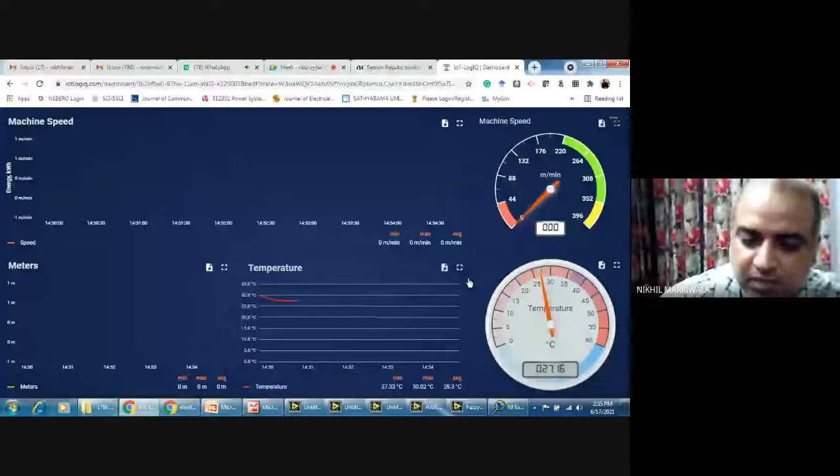Is it feasible to give a live dynamic feed into these fuzzy systems, sir? Yes, sir. Definitely. This is the advantage of LabVIEW. But you have to use some hardware specially designed for that.

So National Instruments is providing the hardware also, and you can do it in real time. I am using it for the communication field, where I send the message in real time, and I receive it, and I see the constellation as well as the errors in that. So the hardware that I'm using for that is USRP. That is even compatible with MATLAB also.

Okay. Sir, is any detailed procedure available for selecting the appropriate defuzzification method, sir? No. That is again what I showed you in the very first slide. It depends on the knowledge base that you have, right? So you have to very meticulously read the literature, understand the problem, and then the fuzzy logic would behave very effectively for you. If I'm doing it randomly, the output will still be there, but it may not be the correct output.

Okay, sir. Thank you, sir. Thank you very much, sir.

Since I am using MATLAB 2013 version, it doesn't have any rule creation option. Yes, we need to build our own fuzzy rule-based system there in MATLAB. But LabVIEW has its own system for building the fuzzy rule base. Yes. Right. Yes, sir. Thank you, sir. Thank you very much, sir.

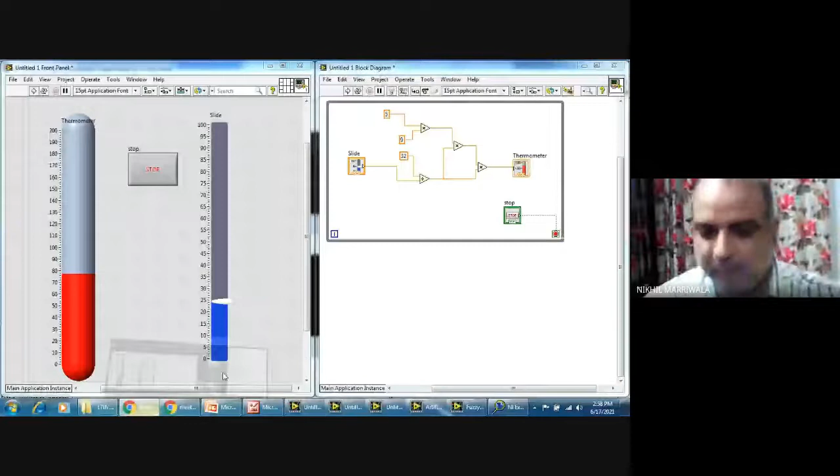Thank you very much, sir. Welcome, sir. Anything else? I think Dr. Ashok Dargar wants to ask something. He has raised his hand. Yeah, I think he is not audible, or maybe by mistake he has raised his hand. Any other questions? Because in the chat box there is nothing. Participants might have enjoyed this live session. I am very sorry for the earlier hiccup. Thank you very much for shifting the platform, sir. Sometimes it happens online. We are also learning and getting solutions very fast. That's great, sir. Thank you very much, sir.